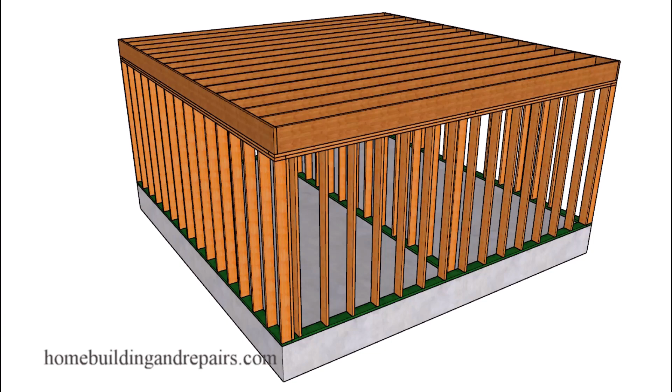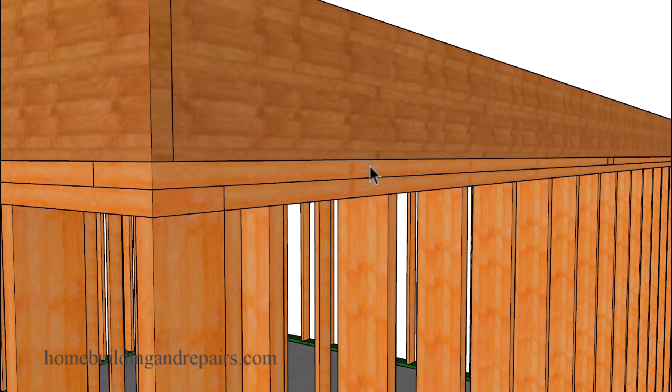In this video, we are going to take a look at a few reasons why your floor joist or ceiling joist might have gaps underneath them in between the top of the wall framing and the bottom of the joist. And what you can see here is a situation where everything is nice and tight because all of the lumber lengths are the correct sizes and there is no deformity in the lumber or in the building foundation. Everything we're looking at here is nice and straight.

However, that won't be the case if the joists are crowned. That's what we're dealing with here. And of course, this is going to be one of the problems you could run into, and even one of the more common problems you're going to run into. Now, we went ahead and looked at the outside.

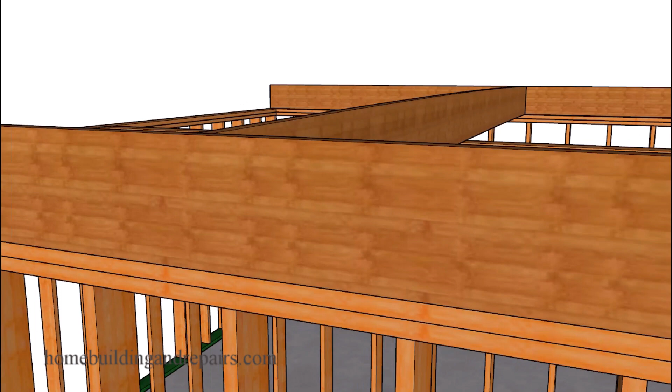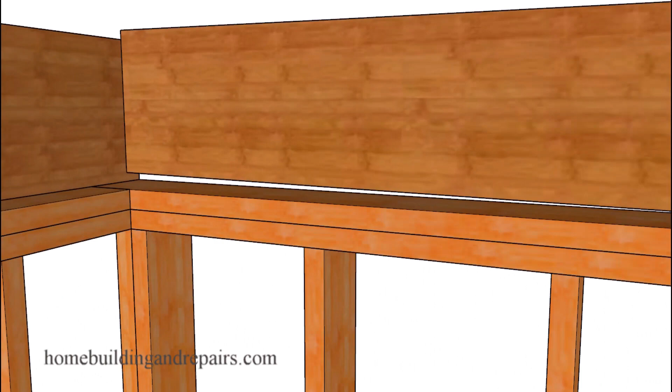Let's go ahead and take a look at another common problem, a gap between the top of an interior wall framing plate and the bottom of the ceiling joist. And the reason for that would be the crowned joist. We could also have a joist that is crowned in the wrong direction, and that would look something like this. So two problems that we could have that would be easy to explain with a flat building foundation.

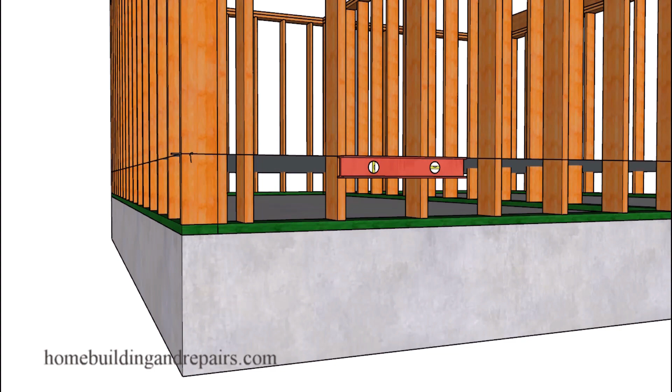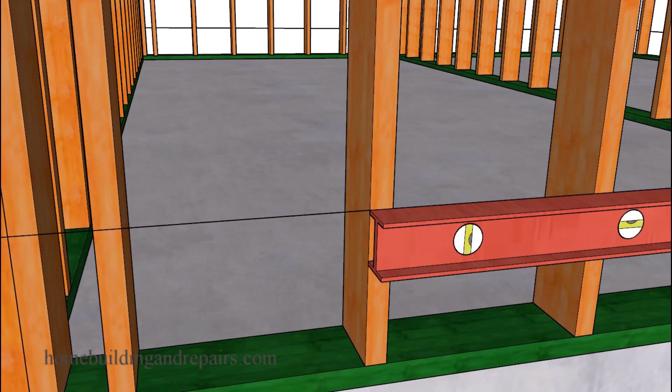However, to find anything else, we're probably going to need to create a level line all the way around the perimeter of the building. And that can be done by using some string and a level. And I do have other videos on how you can put a nail at one end of the building like we're doing here, and then either using a water level or a regular level. I would prefer using a water level or a builder's transit, or even a laser operated tool that you might be able to purchase or rent from your local rental yard.

And in our example, we're going to measure up 1 foot. We're going to start at one corner of the building and work our way around the building.

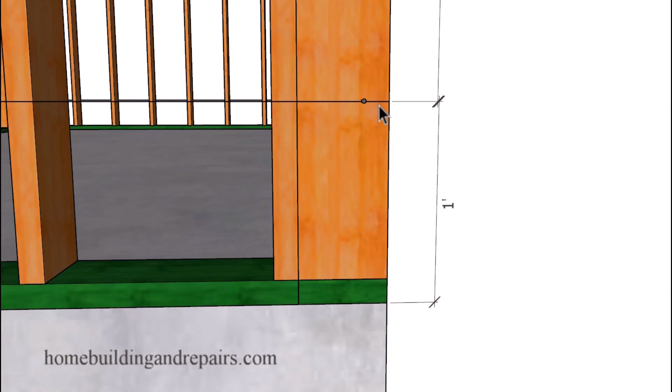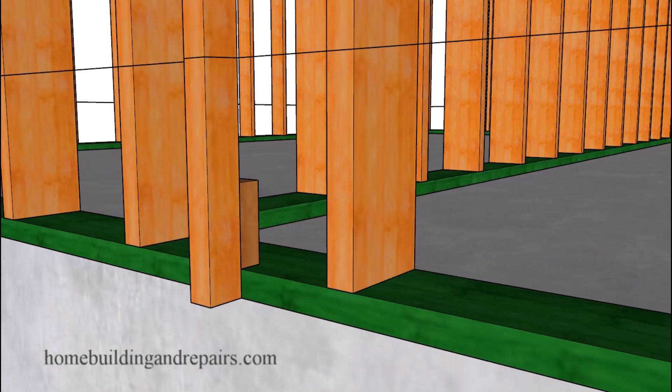Now, you can always create a story pole. That's what I did here. A board with some marks on it and another board that I went ahead and attached to it, so that we could rest the story pole on top of the framing plate, like we're doing in this example here. So not too difficult of a tool to build, and something like this will definitely speed up the process instead

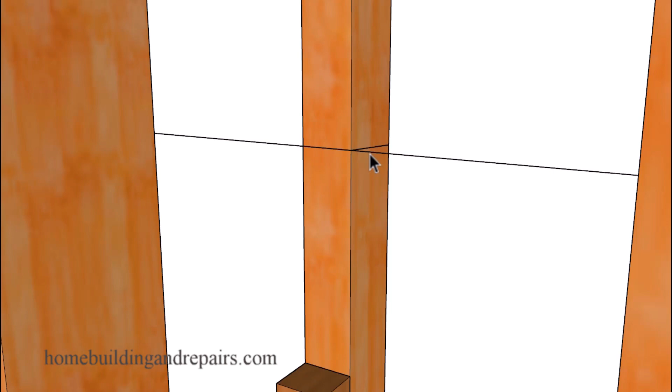of measuring. A lot of times when you measure something, you might forget the measurements or confuse one measurement with another measurement, creating problems with your measurements. And one of those measurements will be the string line that is level. And if the building foundation is already messed up around the perimeter of the building, then you could just simply take a high or a low spot in that building and then use that measurement to deduct any of the other measurements.

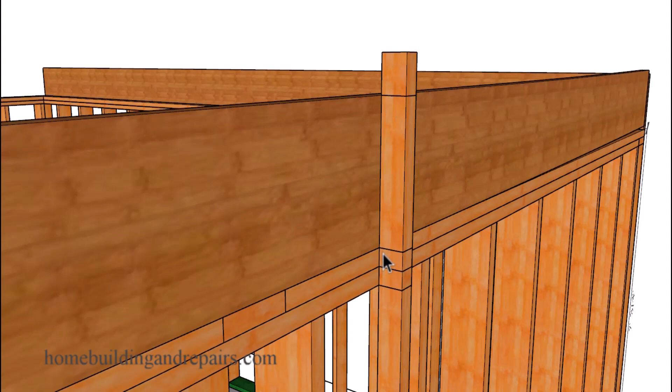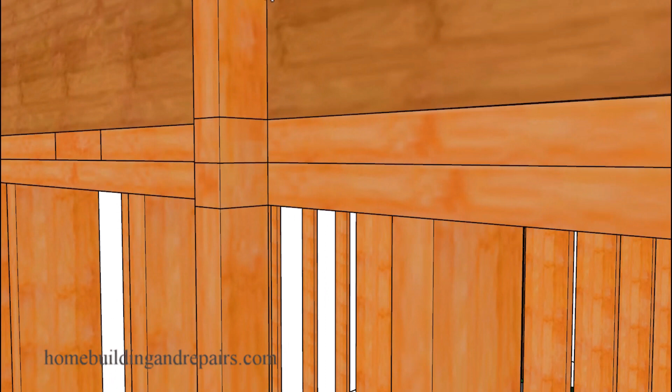So our story pole is going to have a block at the bottom, a line for the string that is going around the perimeter of the building, and you can have a line for the top of your joist, top of the floor sheathing, but we're going to need one for the framing plates. So we're going to need to do something like this so that we can check these key components of the building. And that'll make a little more sense by the time you're done watching the video.

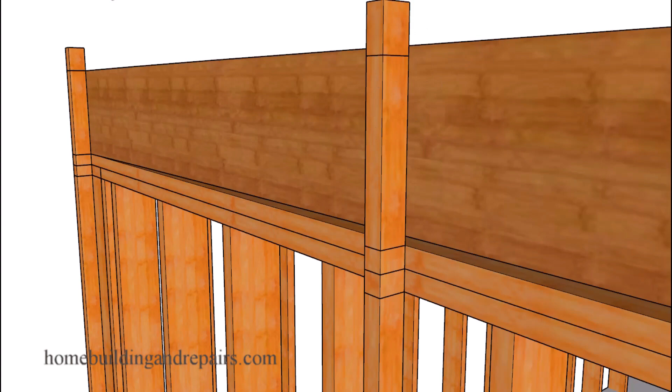So let's go ahead and go back to the crowned joist, where we're going to have everything looking nice at the corners, or at least one corner of the building. However, that won't be the case when we move a little farther away from the corner to find out that our framing plates are still in good shape, but the top of the joist isn't. And by understanding what we're looking at, you're going to be able to figure out whether or not it's the building foundation, the wall framing materials, or the ceiling or floor joist.

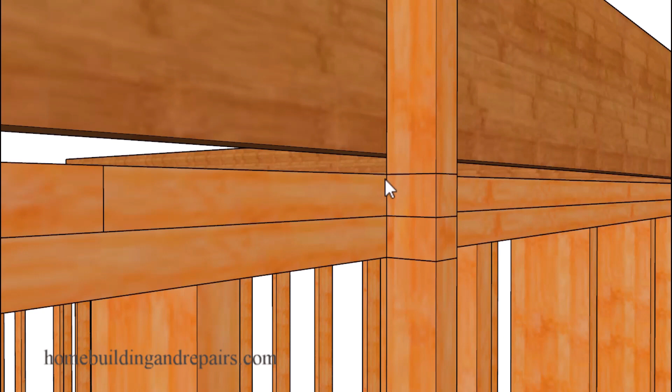So again, everything is looking good at the bottom here, lining up with our string. It's just not working out at the top, suggesting that it's the joist. And if we had a situation where our lines were a little bit lower, our framing plates were a little bit higher, then we could assume that there could be a problem with the wall framing or the building foundation and not the joist.

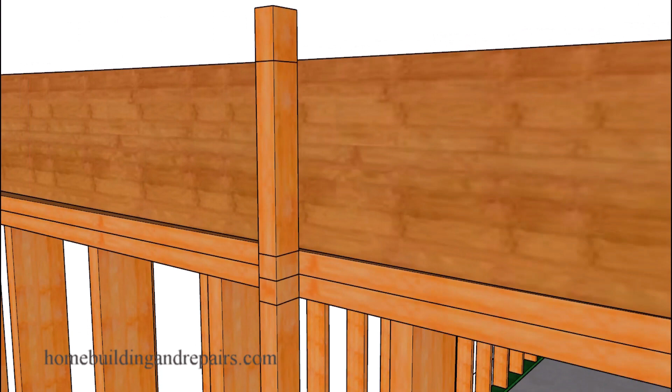Next up, let's go ahead and flip the joist over to where we have the crown down. And everything looks good in the center. However, it's not going to look as good the further away from the center we get.

And if you are dealing with a rim joist, I'm sure you could cut the joist into sections or snap a line from one point to the other point and then cut the sections that are deformed to straighten the top of the floor, and then use wedges or shaped lumber to fill the area underneath the joist.

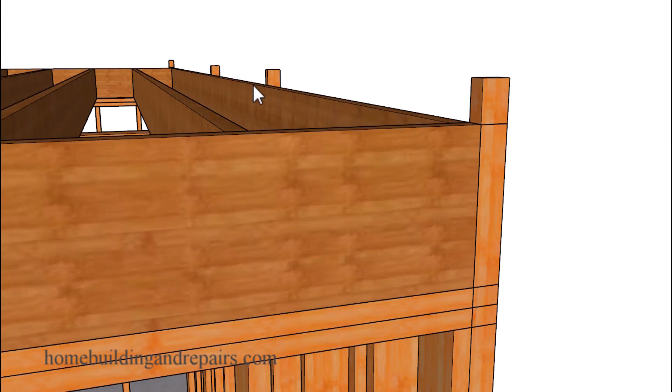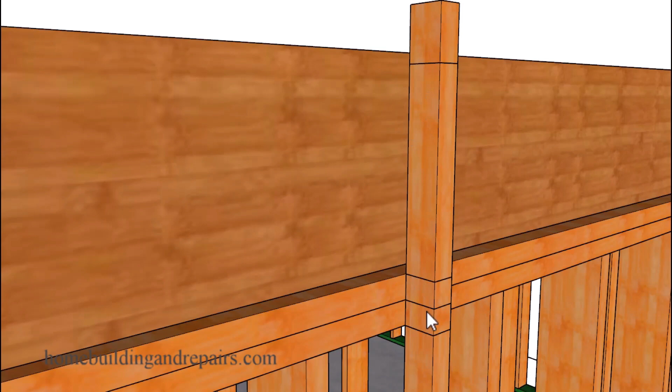Next up, let's go ahead and go back to a straight floor joist. However, we're going to have some problems here with our lines again, not lining up with the top of the floor joist. They're lining up with the framing plates, suggesting that we could have a problem somewhere else.

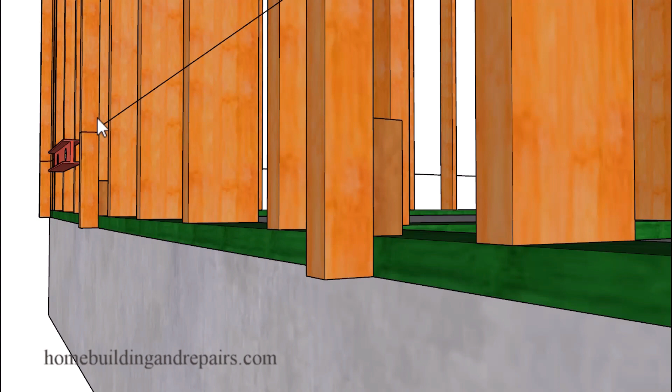So in this example here, we know that the joists are straight. You might not be able to see that on your project, but you will be able to see it once you go down to the lower section and take a look at where the string lines up with the line on your story pole. We can see here where it's not lining up very good, suggesting that we have an upside down crown or a bow in the building foundation, which is exactly what we have because I drew it that way. I know exactly what we have here.

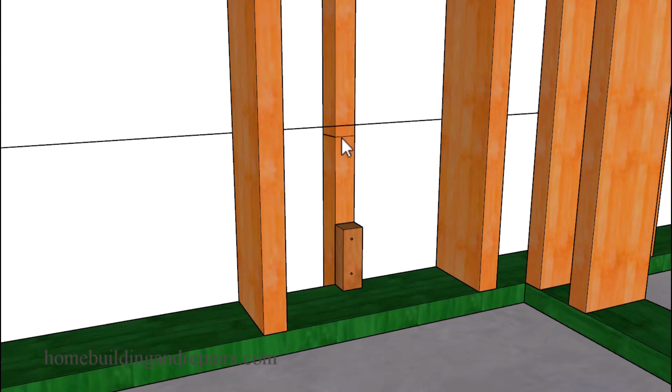So again, we have a situation where the level string around the perimeter is not lining up with our story pole line. And if the line on the story pole was above the level string line, then you would have a crown in the building foundation. And when you run into this, there's a very good chance that you have a building foundation problem. Just keep in mind that you could have a problem somewhere else.

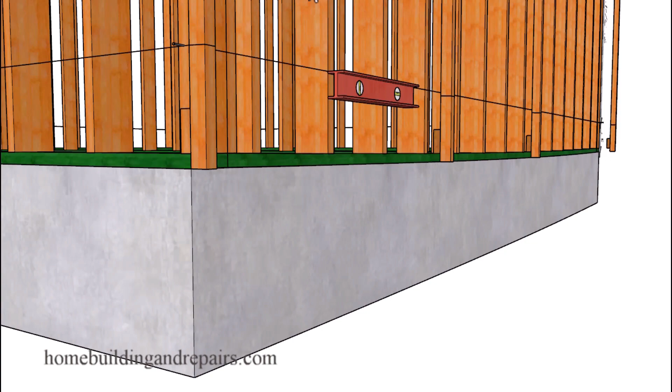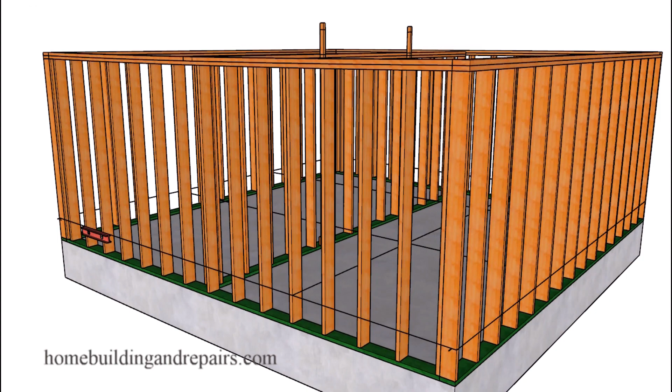So again, we don't have a problem with the corner. Our problem is in the center, and you could see the bow here or the dip in the center of the foundation, suggesting that we will need to adjust the framing somehow. And this can be done by cutting individual studs to the correct height so that we can straighten the top framing plate out. And that's really the key to this video. Using the strings and other level lines throughout the building to figure out the low and the high spots so that you can compensate for them.

Next up, let's go ahead and head over to the interior wall where we're going to set the story pole on top of the framing plate again and see if it lines up with the line here. It's not. Again, suggesting that we have the same dip in the building foundation that we have on the outside of the building. And we're using the string and the story pole line again to figure that out.

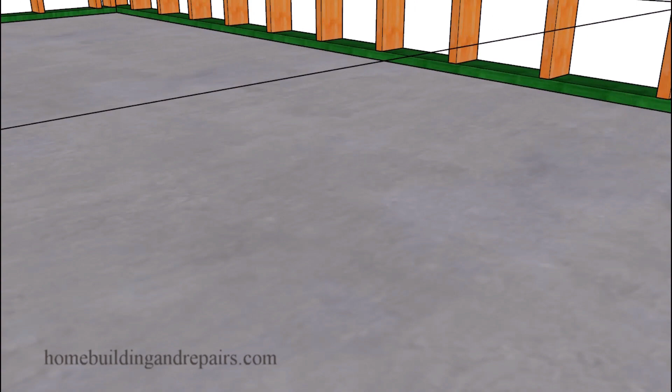And you can put a string wherever you want. If you have the string around the perimeter that is level, then you're going to be able to use that string and line it up throughout a variety of different locations in the building. Like we have here, we have a string going from here to here and two more going from here and to here.

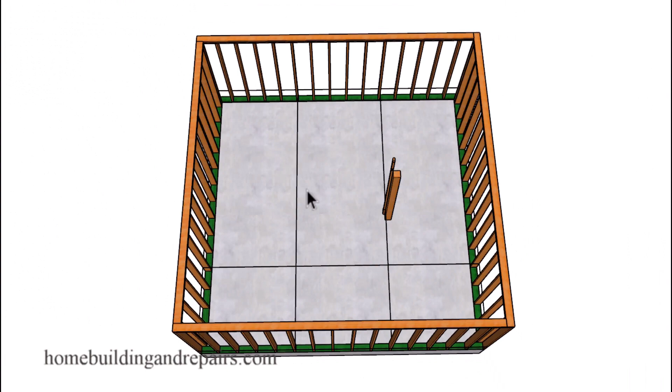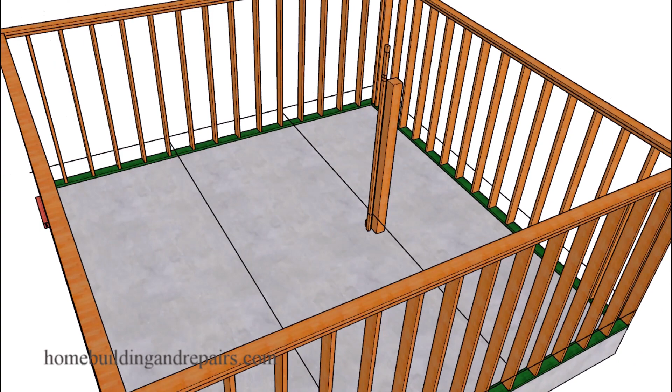And if you want to check the location of a post, again, we can do the same thing with our story pole, or we can simply measure from the top of the string to the top of the floor foundation. And in a situation like this where we might have a 1/2 inch difference here, all we need to do is add a 1/2 inch to the post. And once you have done this, you've created a flat upper floor. Then there's a good chance the floors above it will be level also. You're not going to need to check it again.

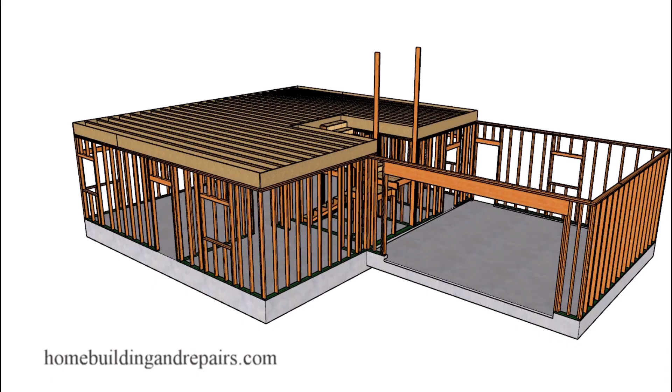Next up, let's go ahead and take a look at a 2-story house and kind of prioritize the areas that are important. And that will be the perimeter of the building, even this wall here. And there's no reason why you can't get those areas straight and level. It's the areas in between that are often difficult to create a flat and level surface for.

So as long as the outside walls are flat, straight, and level, then we can focus on any interior walls that are going to be perpendicular to the floor joist or sitting directly underneath the floor joist like we have here. And of course, any locations where we're going to have posts and beams. So in my opinion, every wall that we're looking at here is going to need to be at the correct height because we don't have any walls missing the joist.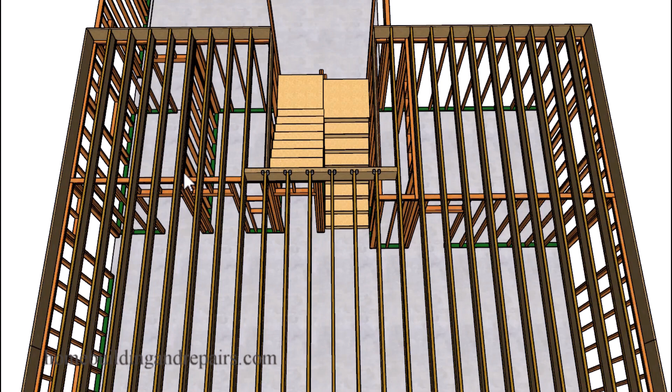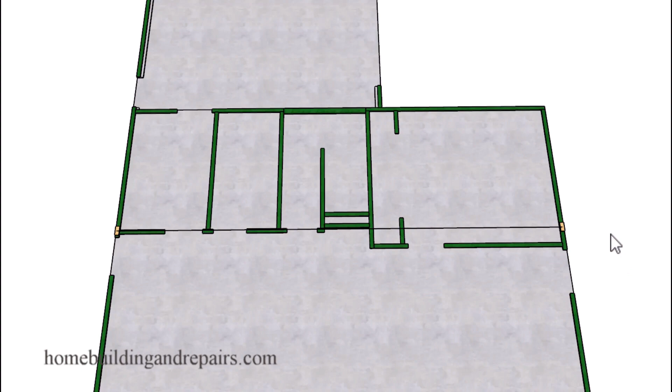So now that we know that, let's go ahead and remove the floor joist and then remove all of the wall framing components. We're going to start with the exterior plates. And you can bolt the plates down to the floor slab or make sure that there are no gaps between the spacer, framing plates, and the foundation for this point and this point, because you're going to be using that point to measure the distance between the top of the string and the top of the framing plate.

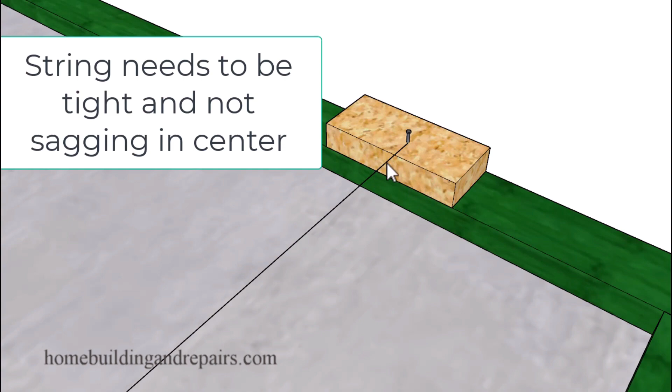And in our example here, we have a 1.5 inch spacer plate. That is exactly what we should have when we go to measure the other points along the string line. So for example, if I have a 1.25 inch measurement here, that's going to tell me that this section is 1/4 inch high, and I will need to lower my wall framing studs 1/4 inch.

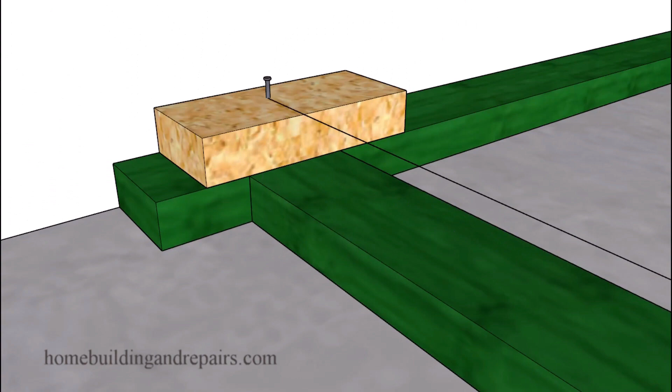So not too difficult to figure out here what I'm doing to check the floor foundation, and most builders don't do something like this. They just hope everything's going to be close enough and leave it at that. This would be something for the true perfectionist. And trust me, to straighten something like this out could be a lot of work.

And you might need to extend some of the framing plates like we did here. Remember, this was a doorway. The plate stopped over here so that we could get a straight line for this part of the building over here. And don't forget that you can put these in different locations.

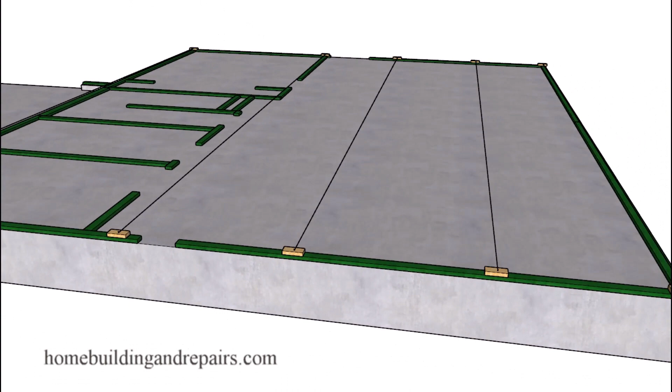I can use it to check this wall here, and I can use it to check any other wall I want to also, or other areas of the building that I might be concerned with. And even though some of these methods might not be practical when building a new house, they might be practical while remodeling one or making repairs to one.